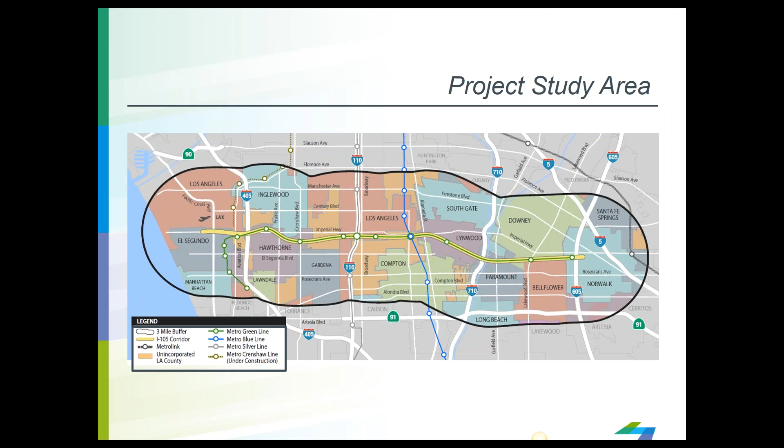This map shows the study area as it was ultimately defined. It includes the entirety of the 105 freeway from the west side near LAX Airport to the east side in Norwalk, almost reaching I-5. It crosses four freeways: the 405, 110, 710, and 605. It includes 16 cities as well as the County of Los Angeles. So it's a study area that basically goes 3 miles all the way around the 105 freeway, inclusive of the freeway and all the modes - arterials, transit, active transportation, bicycling, and walking.

This effort, as I mentioned, is different than traditional planning that just looks at the freeway and its capacity and operations. This is an area Caltrans is actually moving toward for their entire system. They're currently preparing a corridor planning guidebook, which would replace the old transportation concept report guidelines, looking at more than just the freeway but at multimodal transportation opportunities in and near all freeway corridors. That guidebook is being developed now and taken to the public for review. In addition, the California Transportation Commission has developed comprehensive multimodal corridor plan guidelines, which are somewhat higher level but also recognize that Caltrans is moving toward this type of multimodal planning in their corridors. Both of those efforts are available online for anyone who wants to look at them.

Now I'll turn it over to John to talk about the evaluation framework. Thanks, Gary. In order to evaluate these improvement scenarios, we needed an evaluation framework for those multimodal corridor improvements. We first looked at the project objectives, which came from the RFP: improving multimodal system efficiency, transit ridership, reducing congestion, improving system connectivity and access for non-single occupancy vehicle modes, increasing service to social equity focused or disadvantaged communities, promoting geographic equity throughout the corridor, reducing safety collisions and hazards, improving and preserving system conditions, and improving air quality, public health, and reducing emissions.

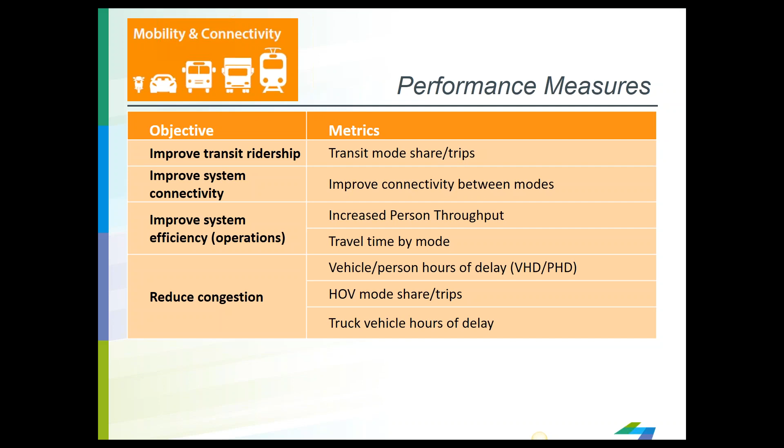For accessibility and equity, there are three objectives, and the metrics measure access to community resources such as jobs, healthcare, schools, and other key destinations; a measure of the number or percent of households near transit stations; and the bicycle facility mileage near fixed route transit as a measure of first-last mile connections.

Looking at the disadvantaged communities or social equity focus populations, we have the travel time by mode for these SEF populations, the mode choice, as well as SEF households near high quality transit stations. And then finally, the geographic distribution of investments.

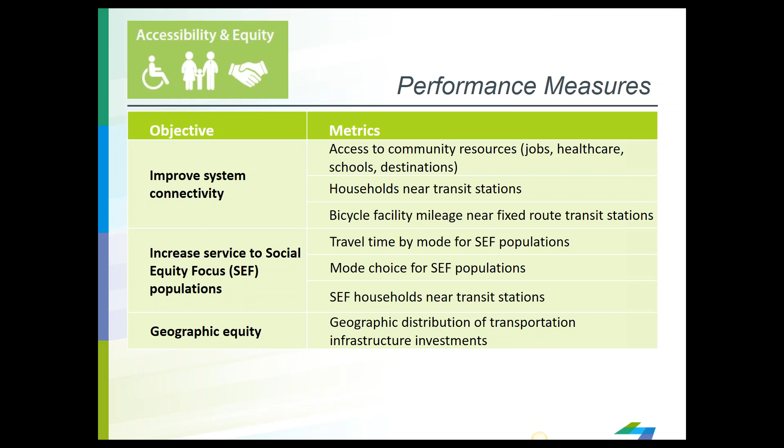On safety, the objective of reducing collisions and hazards, the metrics we're looking at are serious and fatal injuries by mode, as well as any active transportation hazards, recognizing those are very vulnerable roadway users. On the state of good repair objective, we have a performance metric to look at transit assets past their useful life, as well as the pavement condition index.

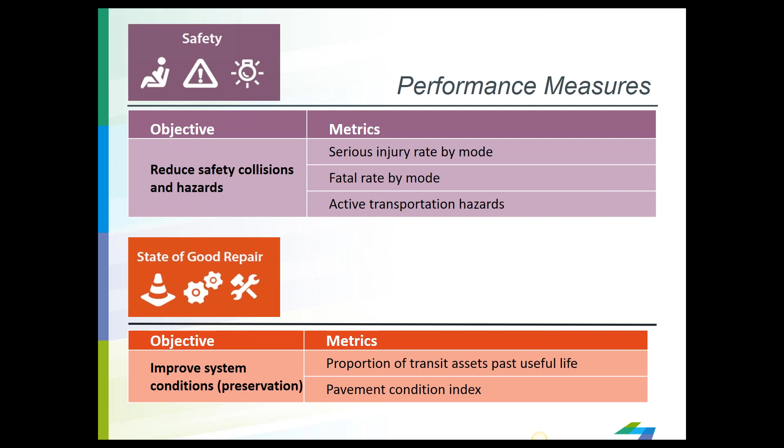And finally, sustainability - there are a number of objectives or potential performance measures. With improving air quality and public health, we have access to parks and recreation, the bicycle and walk mode share or trips, households near major roadways as a public health concern, and the monetary benefits saved due to increased physical activity.

On reducing emissions, we look at vehicle miles traveled, greenhouse gas emissions, the criteria pollutants and greenhouse gases, and also the single occupant vehicle mode share.

Within the I-105 study area, first off we have the existing land use. Within the corridor, it's primarily single-family residential, about 40% of the land area within the study area. Although there is a large percentage of industrial land use, about 13%, including areas around LAX and the supporting industries. Gardena, Hawthorne, and Santa Fe Springs have large portions of industrial land use.

And the single-family residential is that lighter orange color.

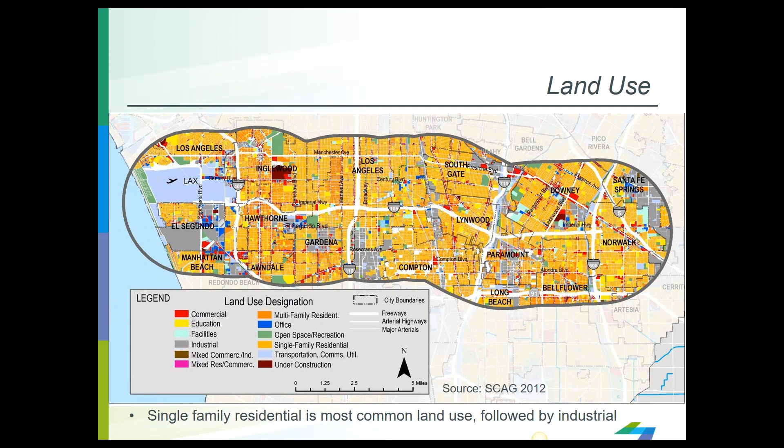Looking at employment density, the most dense areas for high employment are on the eastern and western edges of the study area, and these do overlap a bit with the industrial areas. So you have high concentrations of jobs around LAX and El Segundo and Manhattan Beach employment centers to the south, and concentrations in Gardena, Downey, and Santa Fe Springs on the eastern end, but it's spread out from east to west in terms of employment density. The mix of jobs is similar to the county profile, but there is a higher percentage of transportation-related jobs and lower business and professional services jobs, given its proximity to LAX.

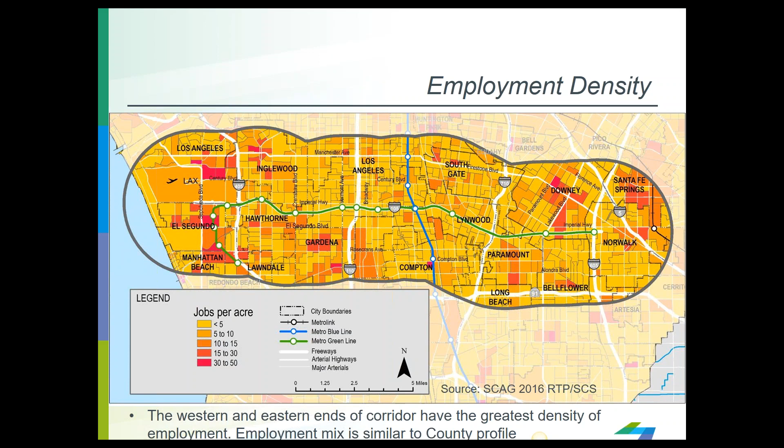Looking at population density, the reverse is true - fewer dense residential areas on the eastern and western edge of the study area, and higher concentrations of population within the central part of the corridor. The total population of the study area is about 1.4 million, about 14% of the county population, and you can see where those higher populations are concentrated.

Looking at median household income, again we see some disparity between the eastern and western edges of the corridor and the central part of the study area - higher incomes to the east and west, with lower incomes in South LA and the surrounding neighborhoods. It's generally a lower income than the county average, with over 50% below $50,000 annually, and 21% of households below the federal poverty level. It's also a heavily minority population - 90% non-white within the study area.

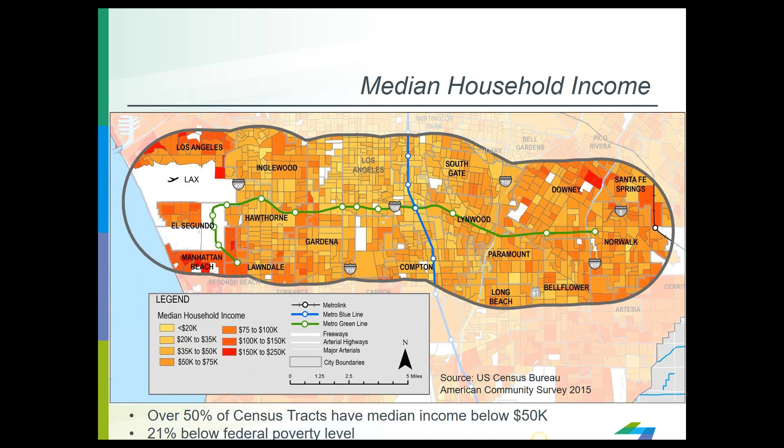So turning to transit ridership, first we have a map of the rail ridership boardings at rail stations. There are two metro rail lines within the study area, the green line which runs east-west, and the blue line that runs north-south. The highest daily boardings are at the Willowbrook Rosa Parks Station, which is a transfer station between the blue and green lines.

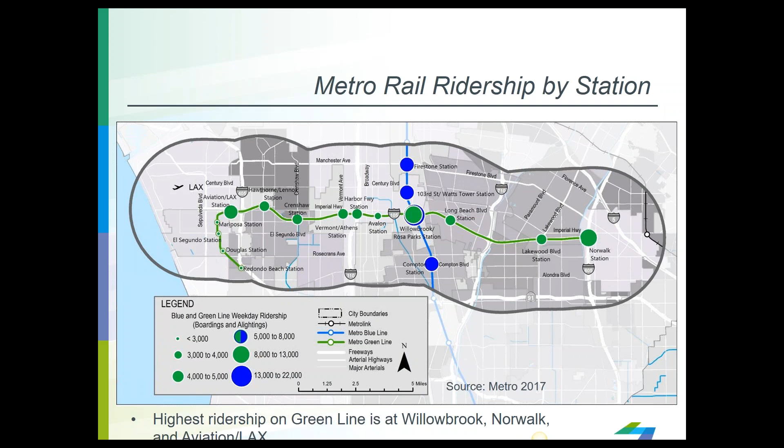You also see high activity toward the east and west ends of the green line - Norwalk Station, which is the terminus and also has a large parking lot, as well as Aviation/LAX at the west end of the green line. The green and blue lines carry about 10% of the metro daily boardings in the study area, but they have seen loss in ridership over the last 4 or 5 years. Actually, over the last 6 years, the green line has lost 28% of its daily boardings, and the blue line is down 18%.

Looking at metro bus ridership, this is a map of bus boardings by stop. You can see where some of the concentrations are. North of the green line is where you see most of the boardings, and I'll show you on the next map that that's sort of a function of Metro's service area as well.

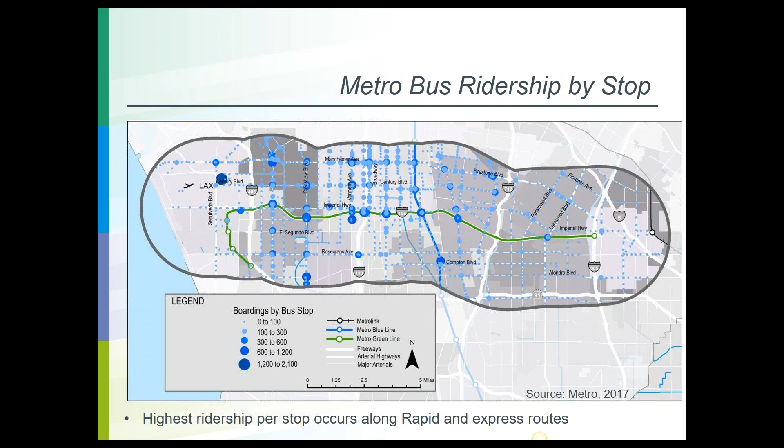In terms of bus boardings per stop, you have rapid lines that have the highest productivity. They generally run north-south and have the highest boardings per stop. The 754 on Vermont, the 757 on Western have pretty good ridership per stop, as well as the Silver Line that runs on the 110 freeway.

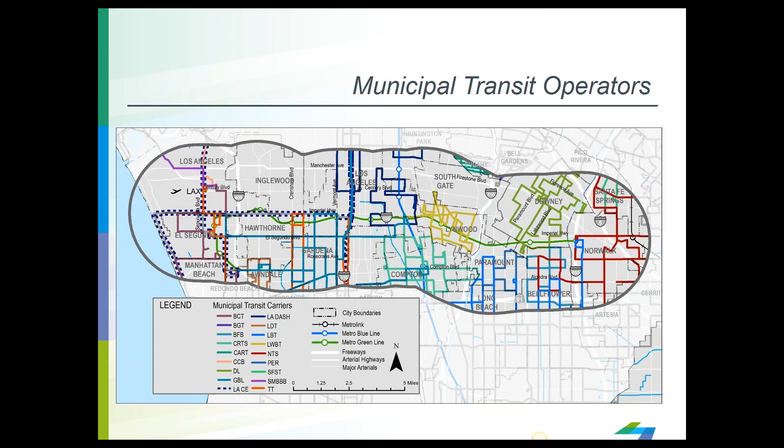Complementing Metro service in this area are the municipal transit operators. A number of municipal transit operators cover a lot of the areas south of the 105 freeway. Some of the notable routes include Long Beach Transit, Santa Monica Big Blue Bus, which comes into the study area, Torrance Transit, Norwalk Transit, Beach Cities Transit, and LADOT, which all serve a number of riders per day.

Finally, we looked at bicycle and walk mode share. This map shows the commute mode share for bicyclists. There's geographic variability in the percentage of residents who bike to work in the study area. Overall, it's less than 1% of all residents who commute to work by bike, which is a bit lower than the county average, but there are some areas with much higher than 1% mode share. This map also shows there's a limited number of Class 2 and Class 1 bike facilities—bike paths and bike lanes—in the study area, so you see some room for improvement there.

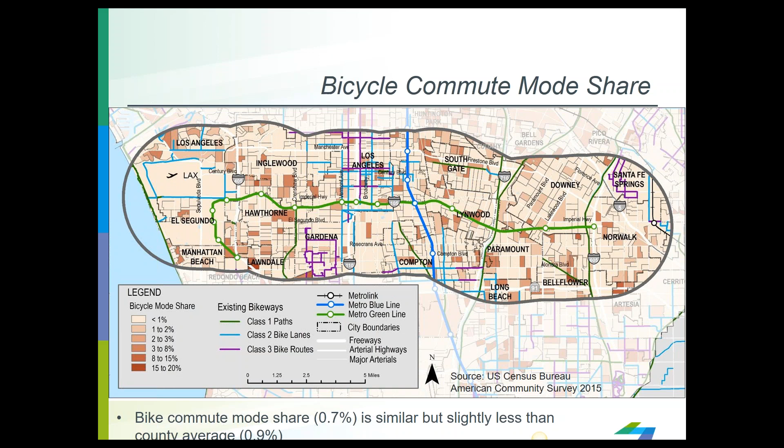As I mentioned, this is a multimodal corridor study. John talked about transit, and we'll talk about active transportation. In addition, we are looking at the freeway itself and the arterial system, and this slide and the next slide show the current conditions on the freeway itself.

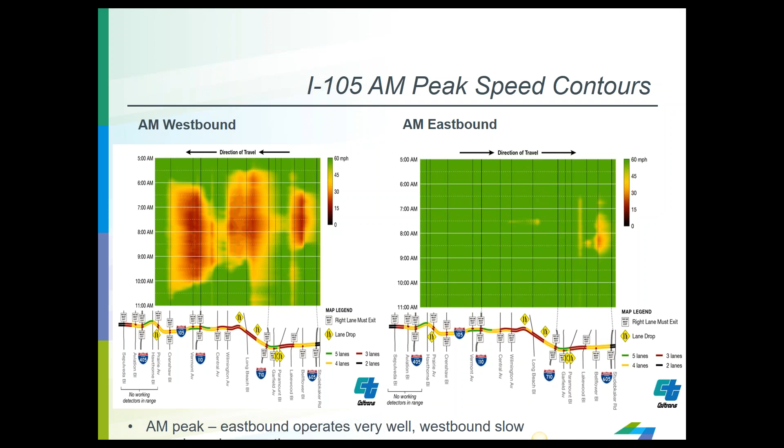The red areas are areas of high congestion, in this case during the AM peak period. You can see the westbound direction is highly congested during the morning peak, while the eastbound is relatively free flow. The next slide shows the opposite, with the PM peak being highly congested in the eastbound direction and some congestion in the westbound. We found that overall the PM peak is the worst time period when you look at both directions and the total amount of congestion.

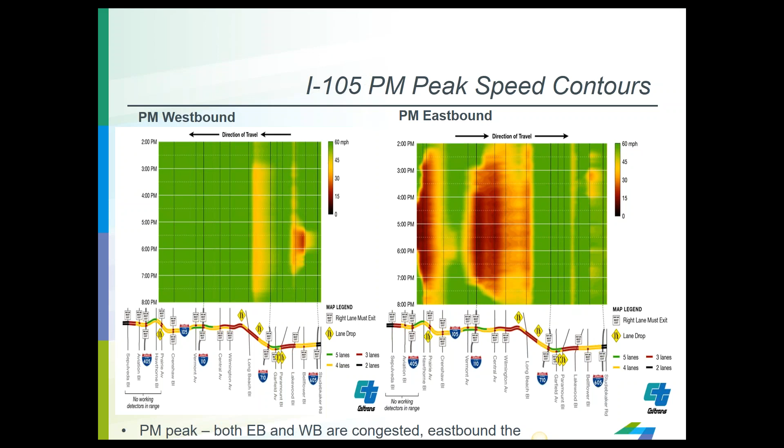Looking at this slide, you can see there is, in fact, a lot of congestion on the freeway itself, certainly in the eastbound direction.

Looking at the arterial system, we used the Arterial Performance Management Tool of LA Metro to look at information such as current speeds on the arterial system—where speeds are slow, where people are experiencing a lot of congestion, either mid-block on arterials or at intersections or both. We're able to look at speeds, travel times, and vehicle hours of delay, and then pick out the arterials with the highest congestion or worst conditions. Those are shown by the red and orange colored lines.

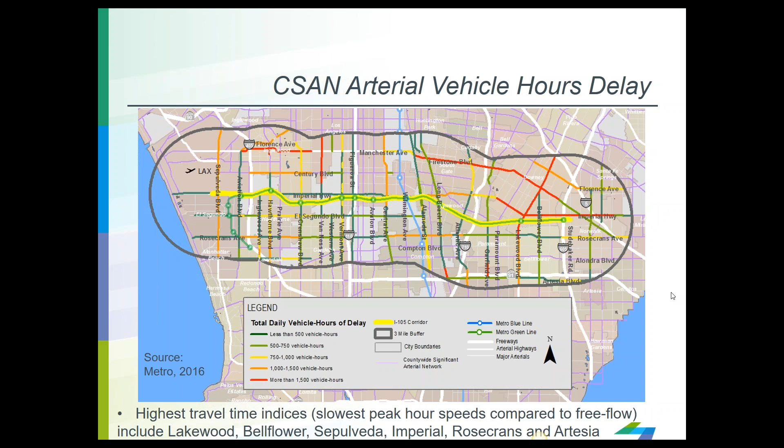We've pulled out those streets to identify which ones are currently experiencing the most congestion—in this case including Lakewood, Bellflower, Sepulveda on the west side, Imperial, Rosecrans, and Artesia—which come to the top as the arterials with the highest amount of delay you would experience driving on them.

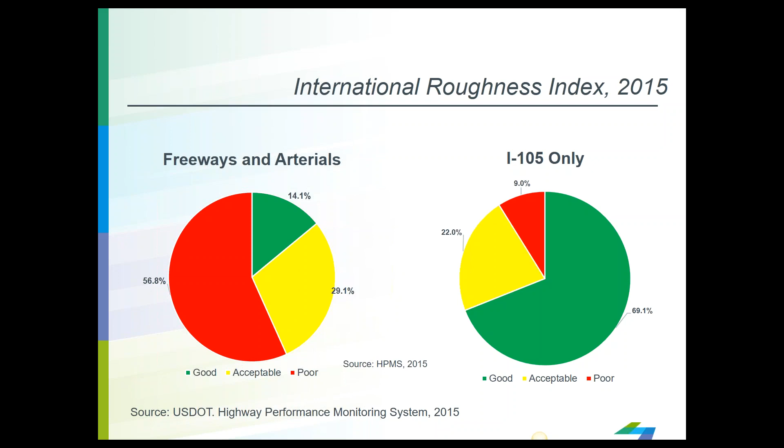Looking at system preservation and the condition of the freeway and arterial system today, there's an interesting dichotomy. When you compare freeways and arterials versus the freeway only, we find the pavement condition for the freeway is overall quite good, whereas the arterial system has a lot of mileage in poor condition, with more potholes and deteriorated pavement. That's something we did expect before looking at the data. Caltrans does a good job keeping up the freeway system generally—this is one of the newer freeways in the system—whereas the arterial system is subject to a lack of funding. A lot of cities simply don't have enough money to keep up their arterial system conditions the way they'd like, and that's reflected in this graph showing almost 60% of the combined freeway and arterial mileage being deteriorated and in poor condition.

We've also been looking at bridge conditions, using data from the U.S. Department of Transportation. Overall, the bridge conditions in the study area are generally good, and only less than 1% fall in the lowest category, which would make them eligible for federal replacement funding. Those are shown by the red dots. In fact, since this map was created, a couple of these red dots have gone away as those bridges have been replaced or repaired. So there are really only a couple of locations considered very poor; the rest are in the generally good category.

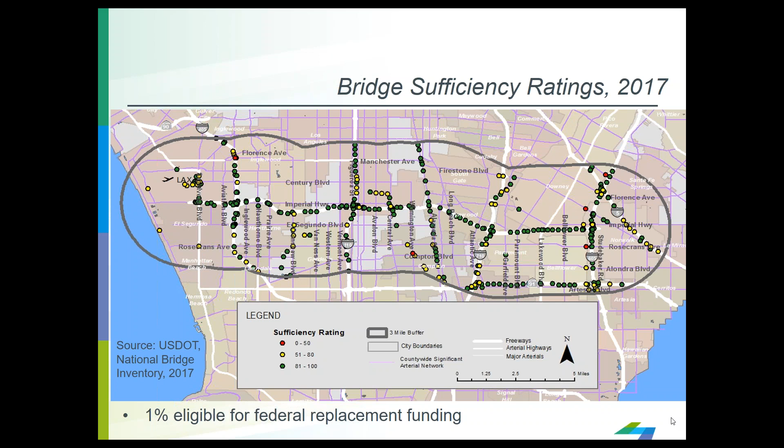Looking at the collision rates on the I-105 freeway and comparing it to the countywide average for LA County, the 105 freeway has a slightly worse history of collisions than the countywide average. As you can see here, it's in the middle with the red bar—it has a higher collision rate than several of the freeways in the county, lower than a few, probably indicative of the fact that it's a relatively highly congested route over its entire area, which leads to more collisions.

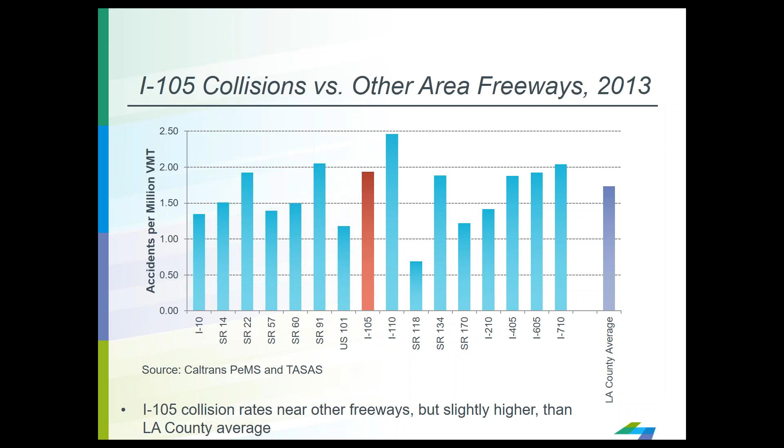We've also looked at collisions between or with bicycles and pedestrians, and we've mapped those. You can see in this map that there's a higher concentration of bike and pedestrian collisions in the mid-corridor area around the 110 freeway in the South LA area, as well as some other pockets such as in the Lawndale, Gardena, Hawthorne area, and portions of Compton.

But the largest concentration, as you can see by the darker colors and larger number of locations of actual collisions, is in the central corridor. We suspect there's a higher amount of bicycling activity in this area where the income level is lower and

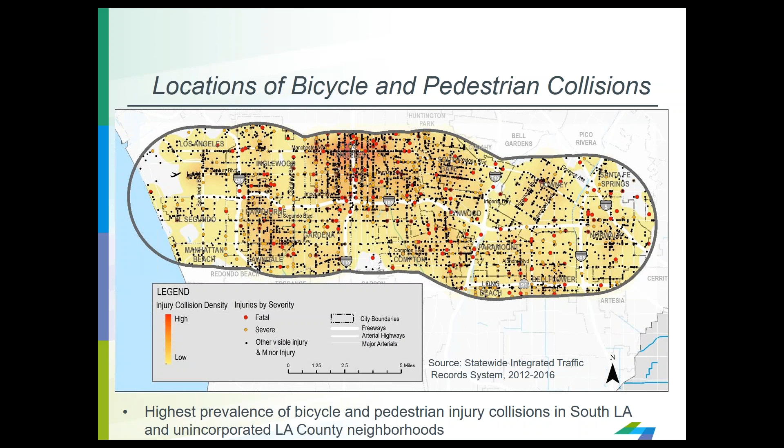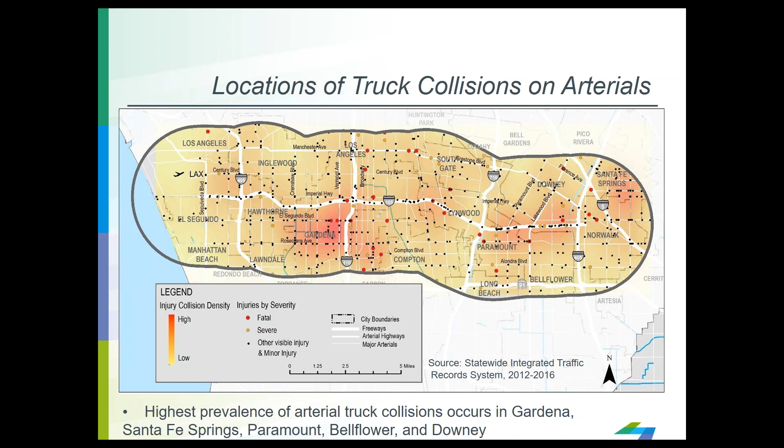people are probably relying on bikes for transportation more so. Looking at similar data for truck collisions, this shows where the preponderance of truck collisions are occurring. In this case, in the Gardena area, which has a higher concentration of industrial activity, along the eastern portion of the corridor near Paramount, and then out in Santa Fe Springs, which again has a very high concentration of warehousing and industrial activity, and therefore truck activity reflective of the collisions occurring relating to trucks. On the freeway itself, the black dots along the freeway are the truck collisions. There are a much larger number east of the 710 freeway where you have a larger number of port trucks that are going east to then go north and out to the Inland Empire.

So we're going to turn over to the future conditions and present some of the similar data from the future conditions. However, it's limited to what is forecastable or easy to model. We're first going to look at the land use and demographics again.

The employment growth in the study area is concentrated in areas that already have pretty high concentrations of employment, with the exception of Inglewood. There's a large tract there, which is the old Hollywood Park racetrack, being developed into an NFL stadium and retail and entertainment complex. But for the most part, you have areas that already have high employment concentrations, such as around LAX and El Segundo, Manhattan Beach, and Santa Fe Springs, that see the greatest amount of total job growth.

Employment in the study area is projected to increase by 15% between 2016 and 2040. This is slightly lower than the county average, but still significant. Looking just at the city of El Segundo, it has the highest growth rate at about 30%, but this only accounts for 9% of the employment growth in the area. Whereas the city of Los Angeles, which doesn't look very dark on this map, has 20% of the jobs in 2016, but accounts for 40% of the projected growth.

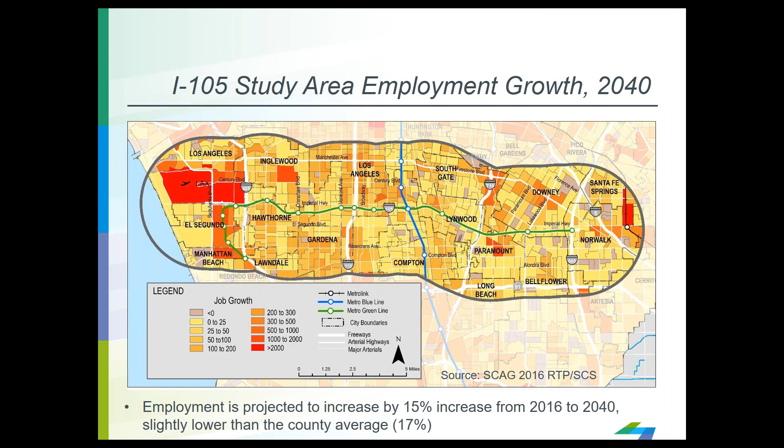The population is projected to increase by about 7% in the study area, which is significantly lower than the county average of around 13%. The majority of the population growth will occur in just 3 cities: the city of Los Angeles, which accounts for 29% of the growth, Inglewood at 12%, and South Gate at 14%.

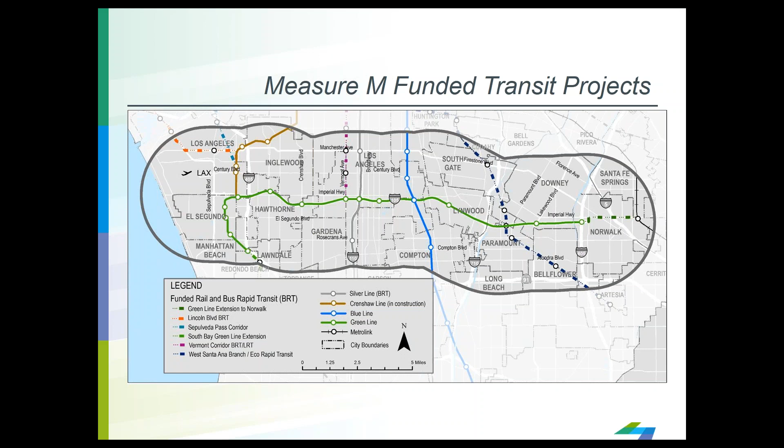Looking at transit, these are some of the Measure M funded transit projects, major capital projects in the study area. From west to east, you have the Lincoln Boulevard BRT, which is a later stage project on the Measure M expenditure plan list. You have the Sepulveda Pass corridor, which is eventually planned to lead all the way down to LAX. You have the Crenshaw Line, which is in construction and should be completed in a couple of years. You have the Vermont corridor, either BRT or light rail. And then moving east, you have the West Santa Ana Branch light rail corridor and the Green Line extension to Norwalk, to the Metrolink station there.

Along the freeway, we've used the SCAG travel demand model to look at what might happen in terms of growth in traffic. We see here that the expected growth in traffic on the freeway itself is around 5%. That doesn't sound like a lot, but as shown earlier, the freeway is already highly congested, so that 5% can actually translate into significantly more delays when you're traveling on the freeway, even with this relatively small amount of growth.

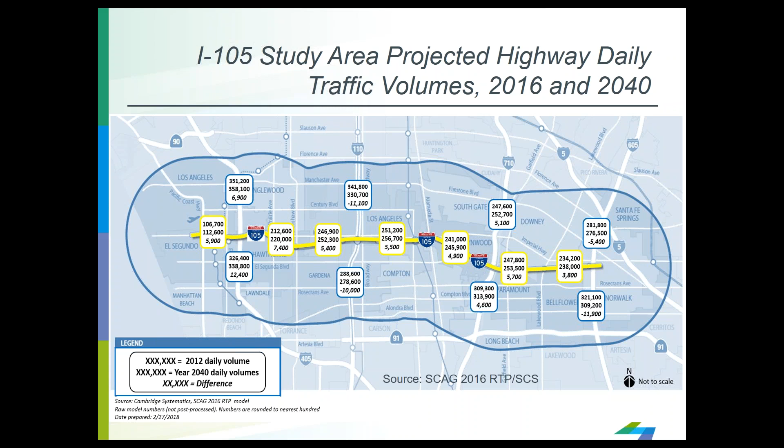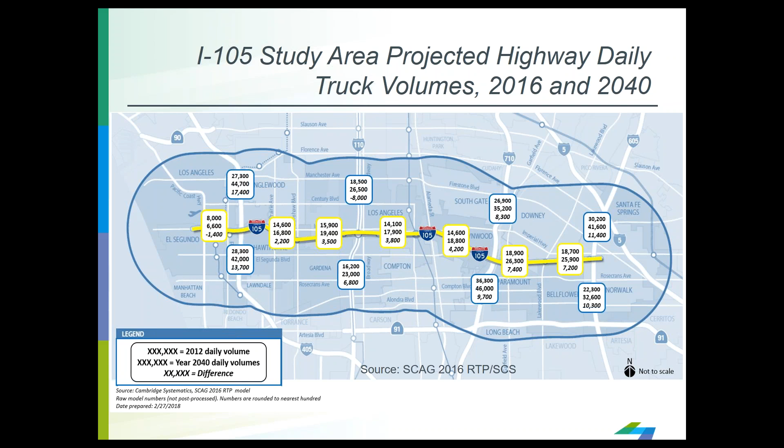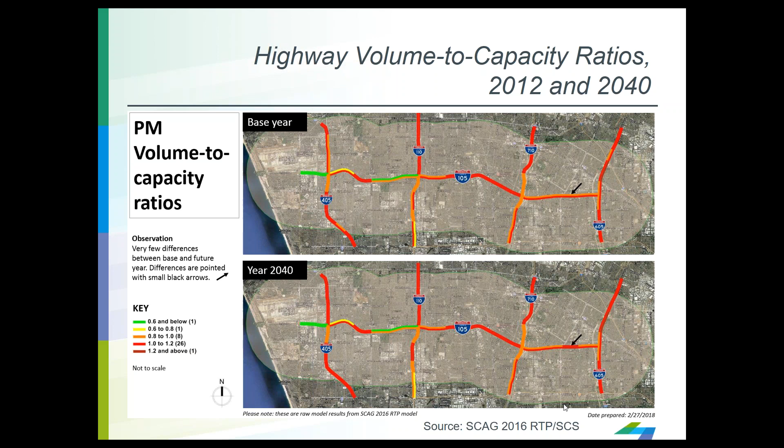There are areas where the freeway is expected to get somewhat worse, but again, this is the PM peak period, and it's already pretty congested, with one exception going westbound. For the most part it will get somewhat worse, and you'd see a similar pattern in the AM peak as well.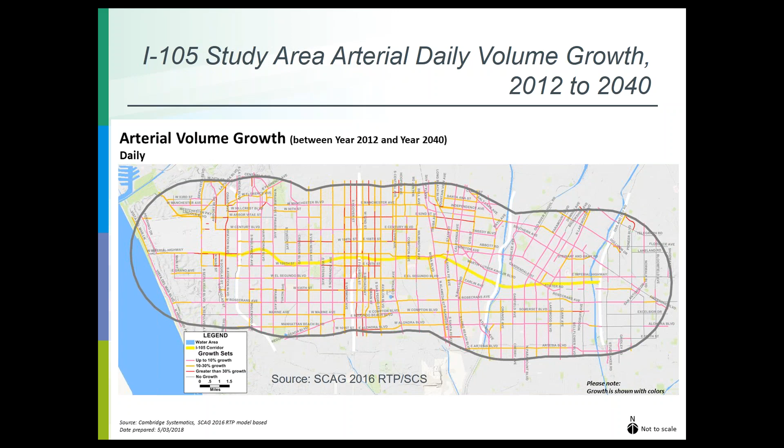So taking these existing conditions and future conditions into consideration, I'm going to talk a bit about what the next steps are and how we're turning this into actual recommendations of improvement. But first, a bit about the process.

So when we're thinking about scenarios, the first thing we want to do is review existing studies and compile all the project ideas out there. We then compare them to our evaluation framework, which we discussed earlier, and then split these scenarios into near-term, mid-term, and long-term improvement scenarios. So I'm going to talk a bit about where we are in that process right now.

So we've collected project ideas. This list, as of a few weeks ago, was over 500 projects: active transportation, arterial, goods movement, highway, and transit projects. This list came from existing planning studies as well as meeting with stakeholders, cities, and other agencies in the corridor to look at the project ideas.

And then also comparing this list to our existing conditions and future conditions analysis to see what's missing and where the deficiencies are.

Step one of the actual evaluation is that framework we discussed earlier. So we established our performance-based framework in the early parts of the project. That's going to be important for the next step, which is to actually provide an initial scoring of each project based on the project type.

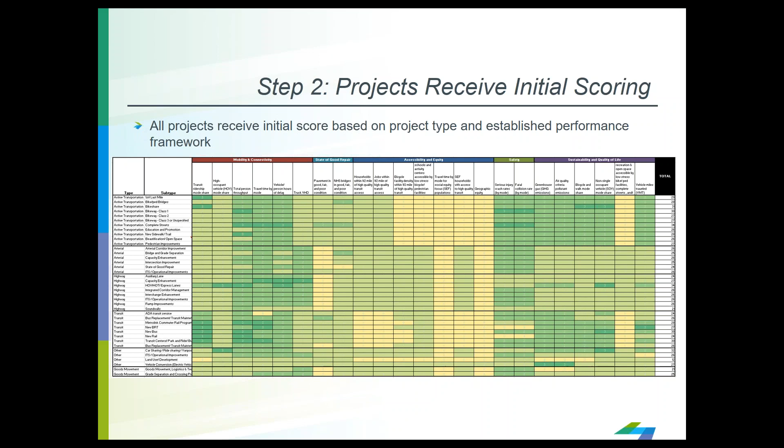But we didn't want to leave it there. We wanted to provide a more detailed scoring for each project. So this is where we actually look at the existing conditions and see, based on the project's location and type, how it might benefit the overall corridor.

So where is this project located? Does it address a known or existing deficiency, such as areas of high delay, safety issues, physical barriers, or connectivity issues? Does it serve a higher employment or population density? And also, just the proximity to the corridor.

Is this really a project that's going to benefit the multimodal movement along the 105 corridor? Does it connect to other modes such as rail stations, freeway on-ramps, bike routes, etc.? So all these extra factors that we're considering will add to the overall project's score.

So taking that all together is what we're doing right now. We've done that step, and we're packaging the different improvements into these improvement scenarios. This is happening in November of 2018.